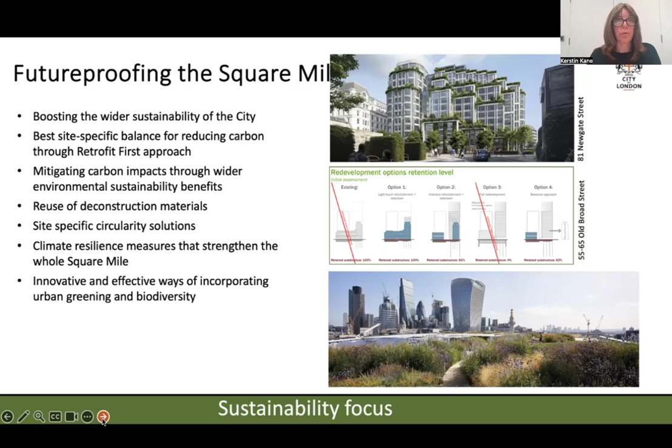Moving on to retrofit and reuse in practice in the city. I talked about our optioneering approach, which is the tool to understand the options and opportunities available for a specific site. This slide shows a few examples of the output.

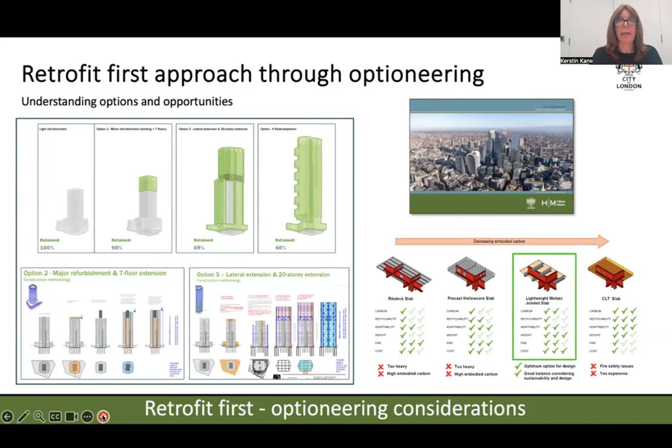For example, on the left-hand side, you see an existing tower and options to extend it or redevelop it. Below you see structural impacts and carbon impacts of those works to extend in different ways. These optioneering exercises give us a really good idea of what the impacts are and how they should be weighed in the planning decision.

We have typical retrofits in the city that are normally late 20th century buildings, as post-war period buildings are often structurally difficult to adapt and add to. An example in an area with height restrictions is 75 London Wall, with good bones, as we call it here, meaning a large percentage of retention is possible while also adding a fairly large extension. You can see the options in this little graph at the bottom.

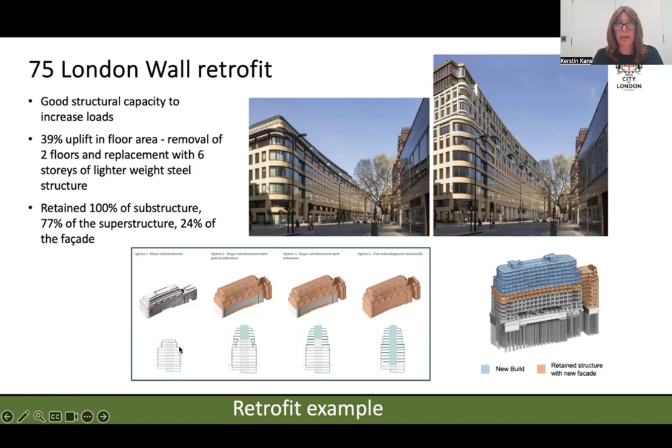Then we have another example here, a site in our tall building clusters where there's still a lot of lower buildings, and where they come forward for redevelopment, applicants now try to retain as much as possible of the existing structure. In this case, they have developed the existing retained structure into the base for a tower that will be inserted into the site. That was quite a new idea.

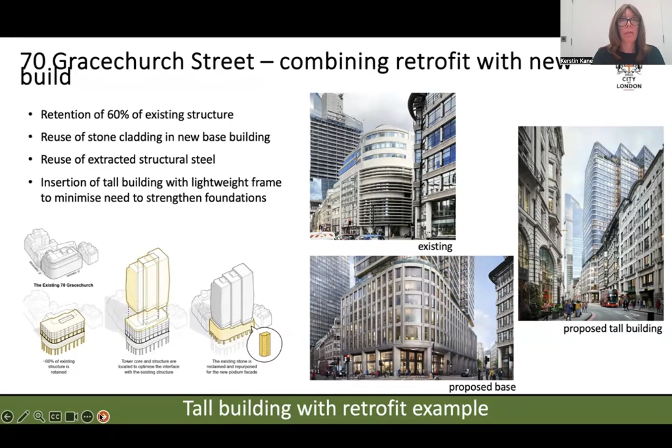So far we had lots of applications that retain various percentages of basements and foundations to save carbon and demolition waste. All this, especially in our tall building cluster, is to achieve as much high quality office floor space as possible.

So I talked about wider environmental sustainability benefits. That's an approach to mitigate high carbon impacts from new development. Here are a couple of examples of what that could be: much more urban greening, biodiversity, cool routes, or waste heat transfer from a new building to an existing site, or exemplar efforts to reuse, for example, fit-out materials.

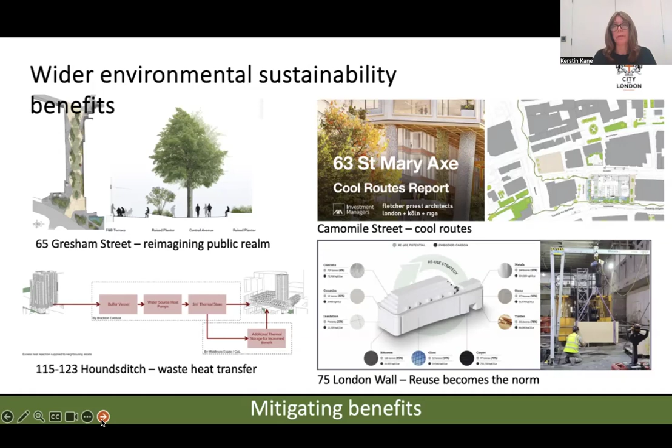All this will be really helpful to make sure that the city develops into a sustainable ecosystem, and that it will encourage a more regenerative environment over time in the city.

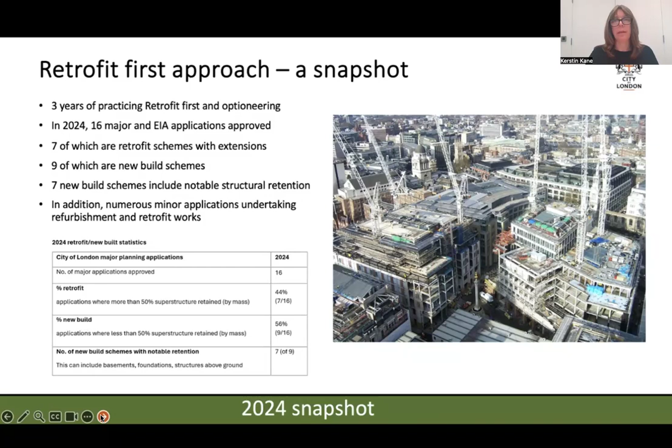So quickly, a retrofit snapshot. In 2024, we had 16 applications, and about 44% of them were classed as retrofits. And even of the remaining 56%, a lot of applications had a notable retention of some structure. Compared to the olden days, this is a notable change, and we are quite happy with this as an intermediate stage.

Lastly, I'd like to talk about how we work with the industry a lot as a kind of reality check, and it's really important to help us figure out how far we can push applicants to achieve carbon and construction material reduction, and also work out how we can support the industry through strengthening requirements and so on, so we can develop supply chain and help circular economy develop quicker, while also ticking the boxes of occupiers to work and live in low energy, low carbon, healthy and resilient buildings. And most importantly, how do we incorporate social sustainability?

That's where we have to collaborate very much with our developers, because they need to help us provide spaces at ground level and roof levels for social activities to make sure the city is proofed for the future. So thank you.

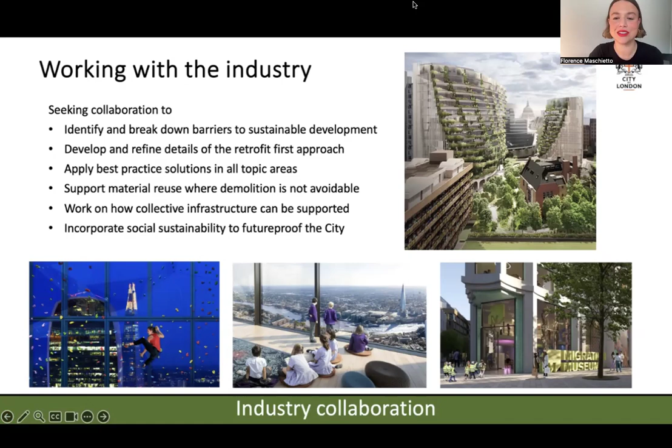Thank you, Florence. Hi there, my name is Luke Kelly. I work for British Land as a project director. British Land are a FTSE 100 real estate investment trust in the UK.

Broadgate Tower itself is a project that we've been looking at over the last number of years. It sits on the north of our Broadgate campus, which was originally built in the 1980s by Stanhope. It sits within the City of London, historically a financial district bounding Shoreditch to the north and Silicon Roundabout. British Land as a company bought into the campus in the early 2000s, and Broadgate Tower was built shortly after.

Having partnered with GIC in 2013, we've spent the last decade repositioning the wider campus from a financial hub, often sterile outside of working hours, seeking to reposition it to a 24 hours a day, 7 days a week mixed-use campus. The campus itself, as developed into that wider master plan, is now 32 acres, including 4.5 million square feet of workspace, accompanying retail, restaurants, bars, and importantly, public spaces.

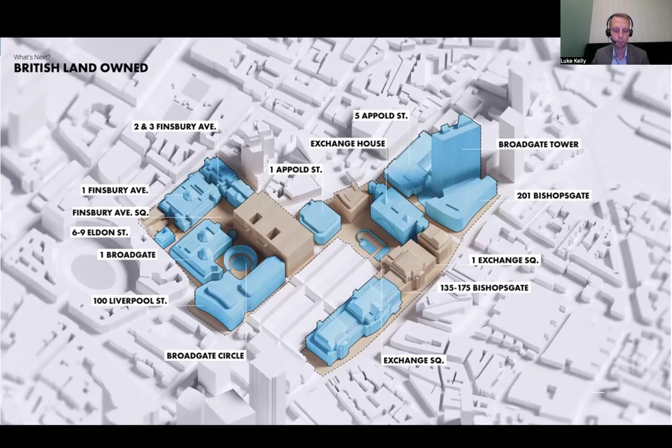This is Broadgate Tower to the right of the image here. It was originally constructed circa 20 years ago. It's a circa 550,000 square foot GIA, 34-story tower. It was built using raft foundations for the substructure and sits above the train lines leaving Liverpool Street Station. There's therefore no basement, which limits our ability to incorporate facilities below the building.

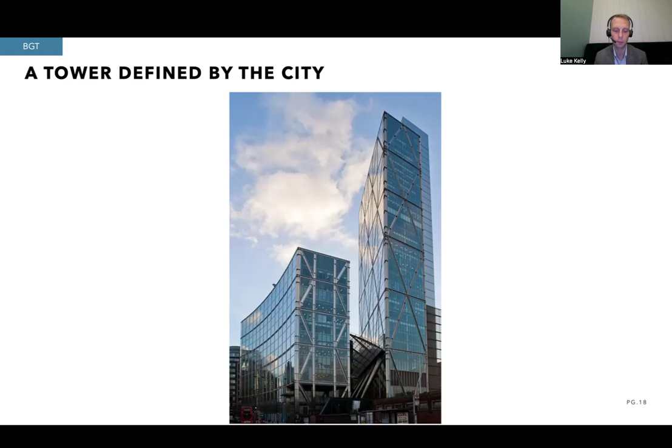The original architecture of Broadgate Tower is something we're all really proud of at British Land. The bones of the building are also very good, as Kirsten alluded to. So we had a great starting point to address some of the challenges of the building's offer, as we realised in the order of 50% vacancy across the building as lease events came to a conclusion.

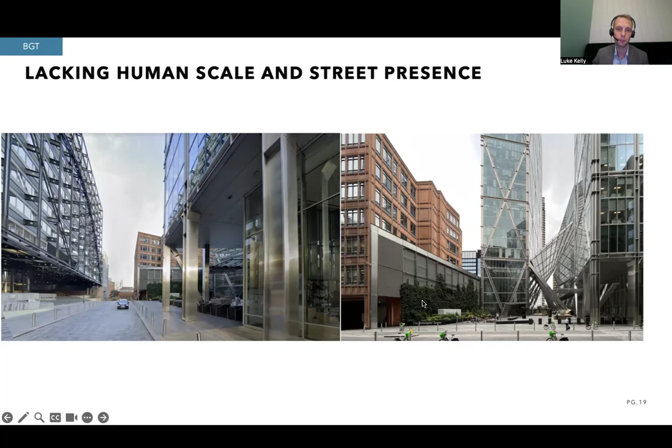We saw the challenges at the time as a lack of street presence, a lack of human scale, and poor amenity offering, considering the requirements of the modern day occupier. The building was a tower of its time, and today's expectations of occupiers have moved on drastically. The existing building had no dedicated end of trip cycle provision, no terracing, no F&B provision, and a very small reception for a building of its size, impacting its user journey.

As I said, the challenge we faced also was that we had 50% of the occupiers in situ during our impending or proposed works, which brings its own challenges in working within a live environment.

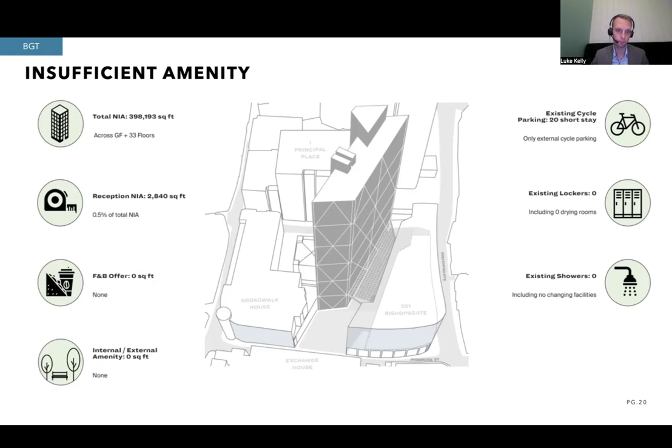So what did that mean in terms of our vision for the space when we set out to review our asset strategy? We had good bones of the building, but we wanted to change first impressions, provide greater presence to the building, and introduce a pavilion outside the front of the public or private realm, outside of the property. We were fortunate to be afforded that opportunity.

As I said, there was no basement for us to manipulate the existing building, but being above the Network Rail land, we had to look at what we could do, one, within the building, and two, outside of the building. So we had a refurbishment within the existing tower, and we sought to add a pavilion to incorporate the additional amenity required to compete with new build stock. We also wanted to improve the public realm and the quality of the spaces around the building.

And we wanted to focus on sustainability as part of it. So as part of the pavilion, we are reusing steel, 70 tons of steel, to support the steelwork structure. We're targeting EPC A and BREEAM Outstanding, which are leading sustainability accreditations within the UK. We're making use of the existing raft foundations that support the tower, so the over-engineered capacity of the existing building afforded us the ability of using this substructure for free, for want of a better phrase.

We are using cross-laminated timber, CLT, slabs in the pavilion, which offer embodied carbon benefits and also visual appeal. And throughout the tower and reposition, we're adopting circular economy principles throughout, leading to embodied carbon of over phases A1 to A5 of 150 kilograms of CO2 per meter squared across the building.

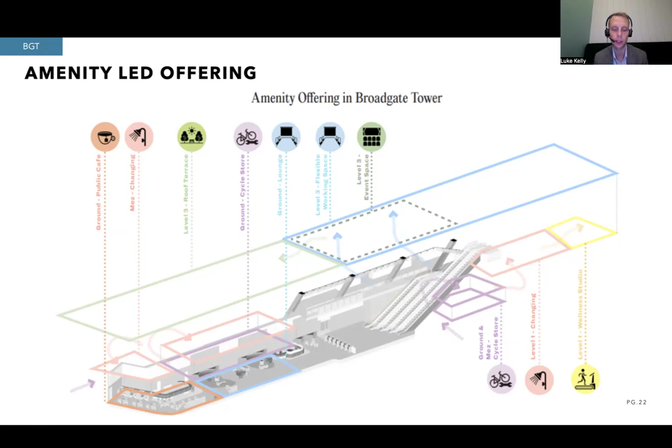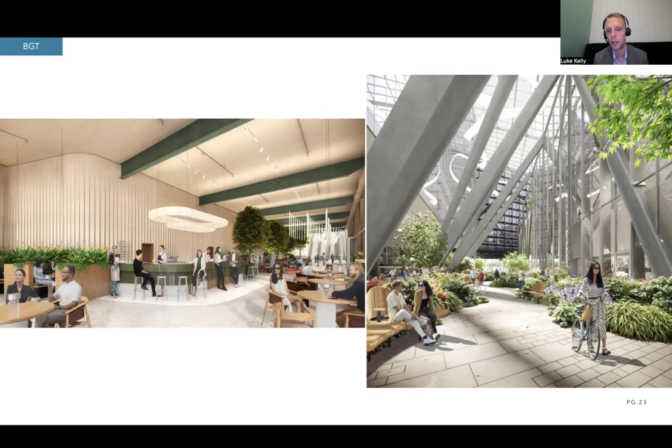We have also incorporated our flexible workspace operator on level 3, which is over 12,000 square feet. As you'll see here, a number of CGIs, but importantly, as I referenced earlier, we sought to improve the quality of the public realm around the building and around our spaces and in between our buildings to improve the biodiversity net gain on the site and improve the user journey for our customers.

And here you'll see a CGI of the final design, celebrating the existing architecture of the building, whilst addressing the vision to reposition the tower. The works are on site and are due to complete in late 2026, which is just under an 18-month construction period, which when compared to a new build is obviously a lot less than that. But thank you for your time.

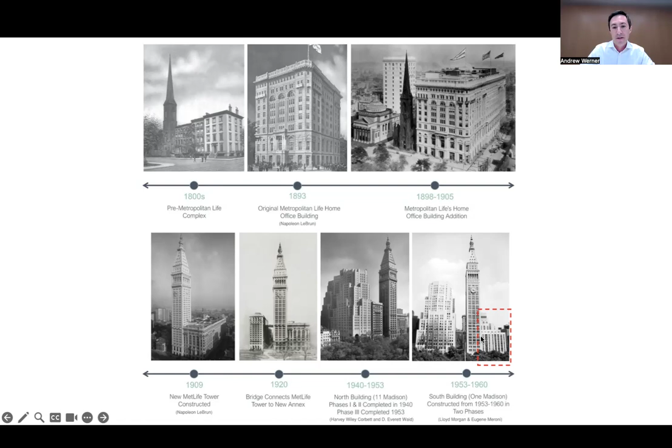This is a full block site, absolutely incredible, adjacent project and attached physically to the landmarked clock tower itself.

So there's really a history of adaptive reuse throughout the evolution of the 19th and 20th century workplace that we had to really pull from to create a new 21st century workplace in this case.

The key to this, as James alluded to earlier with the hodgepodge of agencies and laws here, is that this is an as-of-right project, meaning we did not need special approvals, because the existing site had 220,000 square feet of unused zoning floor area already there. So there was an assumption that we would eventually come back and use it.

What we actually did is we took another 200,000 square feet off the top of the building and chopped off the setback floors that were less efficient from the original podium to draw a clean line essentially at the deck of the 10th floor, then combined those areas and created a new 450,000 square foot tower overbuild on top of the existing podium.

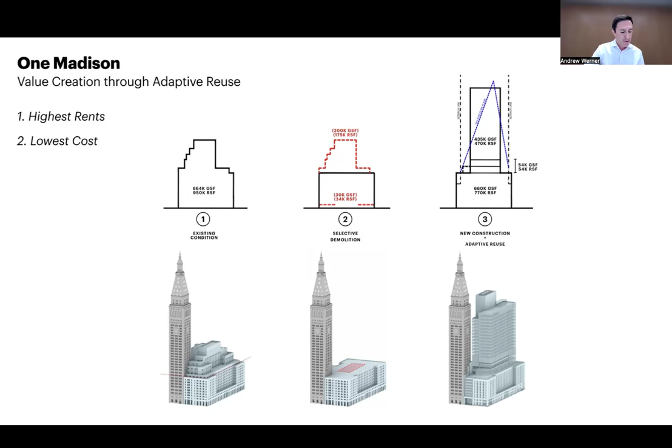In the existing podium, we were able to retain 67% of the existing structure and all of the existing original Alabama limestone exteriors. So when this first came to us as a competition entry...

SL Green had proposed adding a tower on this, but doing it in a way that basically reinforced hundreds of columns and beams in the project and added a mat foundation at the 10th floor and added a tower overbuild.

We were at the time coming off of a couple of projects, one of them being 390 Madison, just up the street on 47th Street, where we did this exact thing and had some really good lessons learned. We said, you know what, we've gone through this process before, and it actually isn't the most efficient approach in doing hundreds of columns and beam reinforcements.

It created an inefficient core. It created all sorts of inefficiencies in both cost and time. And we thought we had a better idea.

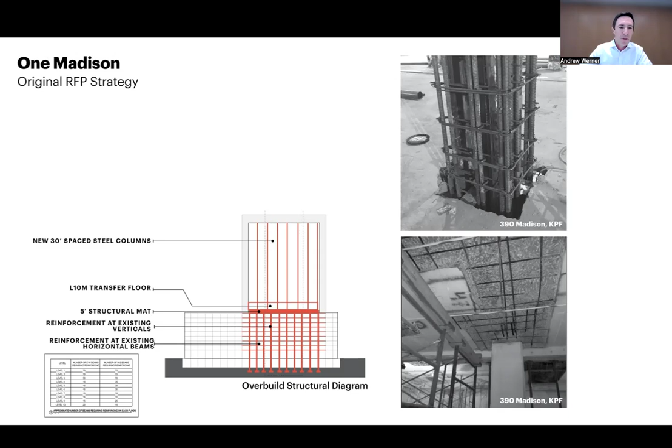So in working with Severud, our structural engineer, we developed an approach that was basically better, faster, cheaper, that also allowed us to create a much more efficient project and a much more 21st century focused workplace.

So what this allowed us to do is by taking 8 mega columns in total, we reinforced only 8 columns of the existing project, drilled a brand new core down to bedrock, and then placed a truss on top of those mega columns to carry the tower loads, while the core carries the lateral load back from the new tower. That creates a 12,000 square foot hole, which you can see in that upper right-hand image, that we drilled for the new core, and then we come back up out of that core with the new construction. By retaining the existing structure and facade of the building, that's 67% of the existing structure that was reused.

It also allowed us to reduce our life cycle carbon analysis by 47% by reusing all this. That's about equivalent to 20 years of operational carbon in the building to retain this existing structure.

Which in New York is, I'd say, a bit less of a well-traveled area than it is in London. I think London has a great history of adaptive reuse that's continuing really well. Here in New York, we're just starting to get the hang of it, because the American approach sometimes, unfortunately, is to clean slate and build again. But I think here, creating new from existing and repositioning this asset was absolutely the right way to go.

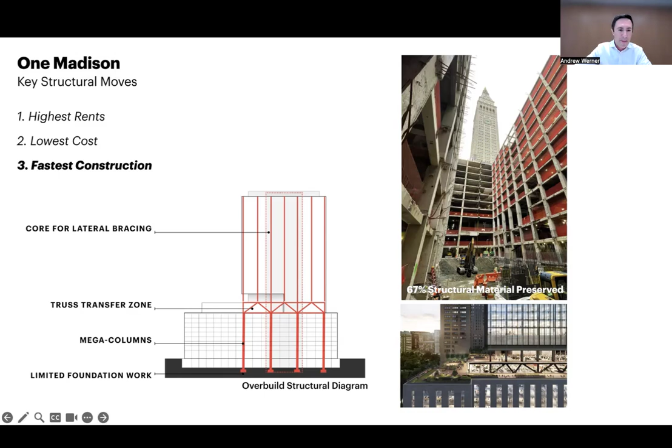The combination of these two pieces, old and new, also allowed us to pull them apart and create this incredible space at the 10th floor and again at the rooftop, creating over an acre of outdoor space that connects back to Madison Square Park and anchors the key offerings of this building to reposition this project into an absolute trophy Class A office. The biggest piece of that is access to the outdoors, improved indoor air quality, light and air, larger, better windows with better air handling, and amenitization.

As Luke alluded to at Broadgate, a big piece of this here was curated amenities to allow office workers to get things at grade, both publicly accessible food and beverage and also private spaces accessible to all the office workers, like a specialty rooftop above.

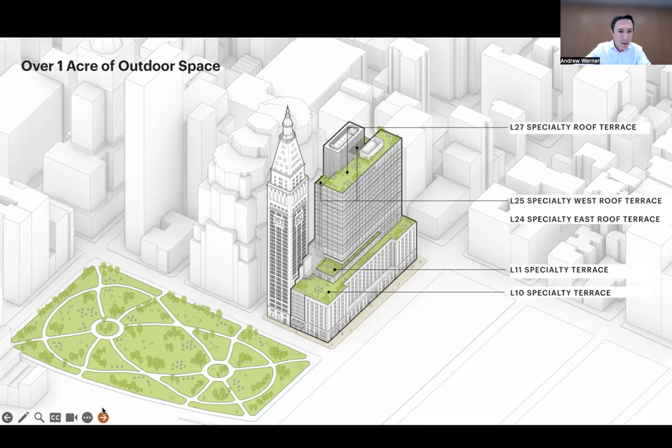You can see here the construction sequence and how we pulled this off. As we tear off the top of the building and drill the hole straight through the center of it, we start to come out with the wrapping of our mega columns — again, only 8 columns in the whole building.

As the new core is built up, what's incredible is the speed at which we were able to do this. From the time of the addition of the tower truss in that bottom image to the topping off of the steel in the tower, that was roughly 3.5 months. The speed at which we could do this was absolutely incredible and really transformed the process, giving the developer an incredible amount of time and cost certainty.

We actually went back after we won the competition and stress tested it with SL Green and Hines and Tishman Construction, who was costing the project at the time, and proved out that doing this approach — basically taking a sledgehammer as opposed to going with a scalpel — was actually the right approach for the project.

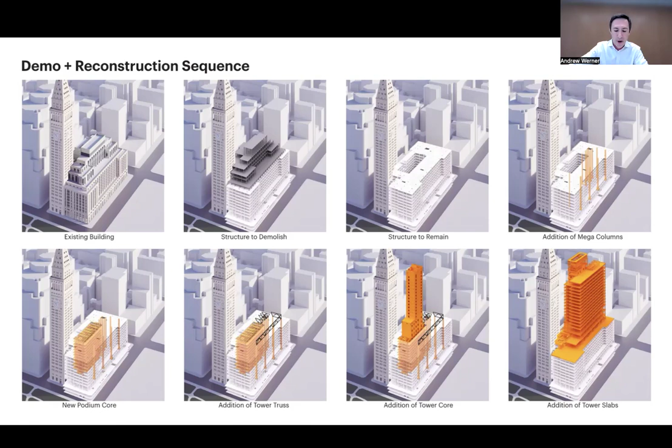The key here is getting to what's shown in the upper image, the tower. The most efficient way to yield really good Class A 21st century office space is these huge tower floors. It's funny because they look very small compared to the podium down below, but those tower floors are 28,000 square feet gross, about 35,000 square feet rentable, with a 60-foot 6-inch deep span from core to perimeter with no columns, and about 280 feet long in the east to west direction.

That is that premium Class A office space that in New York City is ultimately reconfigurable, with 10-foot ceilings, and you can rent this stuff for $150 to $250 a square foot. So for the developer, the profit is really in how efficient you can make that office space.

The beauty is that also gives us these really interesting podium floors, where we've created a core biased to the north to also give us the northern side core for the tower, with these huge 85,000 square foot floor plates that are 425 feet east to west, providing really great space that has gotten a lot of attention from tech firms — IBM has actually taken this as their headquarters. IBM occupies the lower floors in the podium, and Franklin Templeton, the financial firm, occupies the upper floors of the tower.

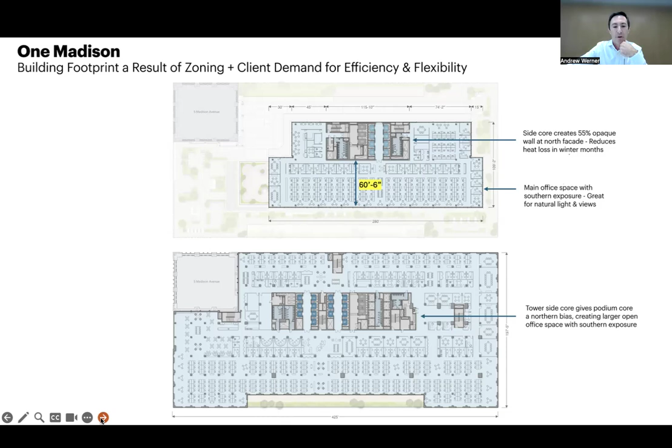The benefits here, as you can see on the slide, are that the northern side core really improves our energy efficiency by creating this opaque wall system while getting great southern light coming in on both sides. And you'll see opening up the windows and creating new curtain wall systems in the podium really improves natural light penetration through the existing podium.

On the left you can see the existing windows in the podium were tiny punched window openings with big highboy radiators below them. What we did was remove those windows and the spandrel panels, retain the existing insulation and solid laminated limestone in between the windows, and replace them with huge, about 3 meter by 3 meter square apertures of new double glazed IGU curtain wall system.

This greatly improved the energy efficiency, and even better for energy efficiency was the existing limestone, which was from 1958, solidly laminated to the exterior.

Then by using a DOAS system—that's dedicated outdoor air system heating and air conditioning—we were able to reduce the duct sizes significantly throughout the existing podium, which allowed us to raise the ceiling heights from about 8'6" to almost 10 feet in some locations.

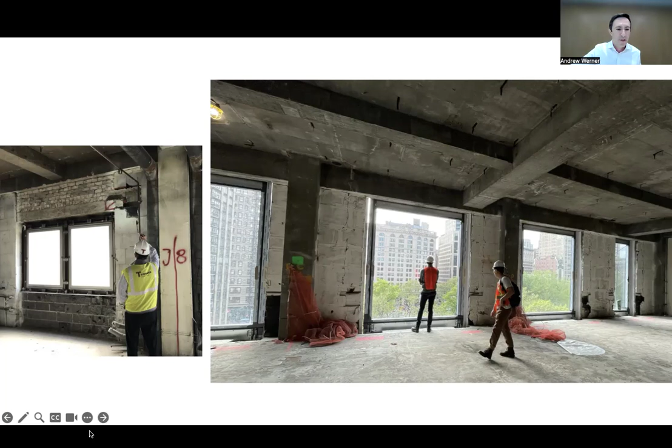Here's a shot of where the tower comes together with the existing podium, and you can see the expressed truss that supports all of those tower columns, feeding down to the mega columns. That is actually IBM's all-hands floor.

They have this huge, incredible outdoor space, and then the floor above it, which Franklin Templeton is building out now for their terrace. You can see Madison Square Park beyond, and the new infilled curtain wall zippers of the existing podium along with the existing Alabama limestone on the facade.

This is where it all goes. Up in the tower, these are your 60-foot 6-inch by 280-foot long floor plates, 10-foot clear, actually 10 foot to the transom and 11'6" to the underside of the steel. This is the ultimately reconfigurable space that is so valuable to all of these large blue chip companies today, and it creates the value that allows us to do a project like this.

And then to top it off, at the top on the roof, we have this incredible event space. We worked with David Rockwell on the interiors for this piece. This is an event space that during the day is open to everyone in the office building to come up and have lunch.

We actually have this integrated with a common space accessible off the lobby. People can grab and go, pick up food, come up here and sit outside or inside on the rooftop. They also do happy hours after work up here, and third parties can rent this out for events. It's a very in-demand space these days.